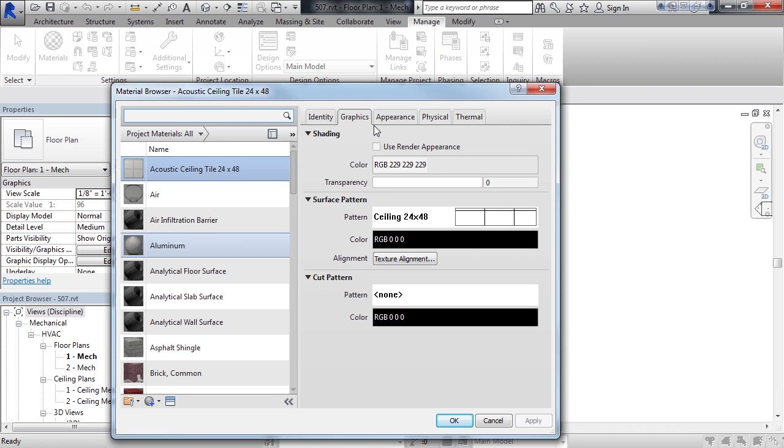The first icon in the settings panel is materials. Materials are loaded into Revit to be assigned to different elements like walls, doors, and windows, and they have a variety of settings: graphics, appearances, physical attributes, and thermal attributes. This information is used when we do analysis on our actual Revit models.

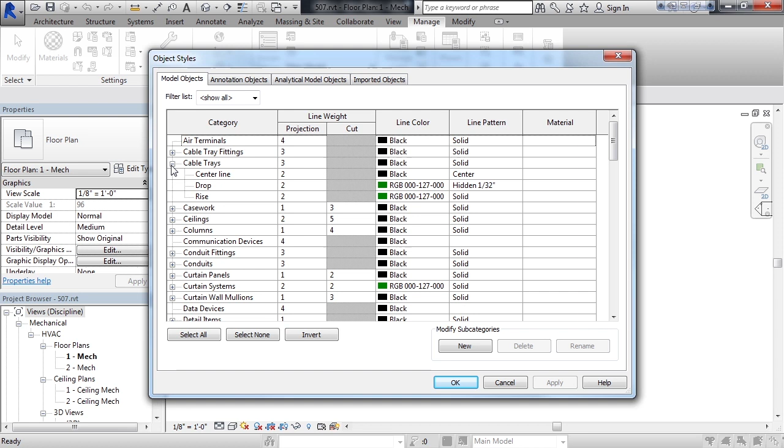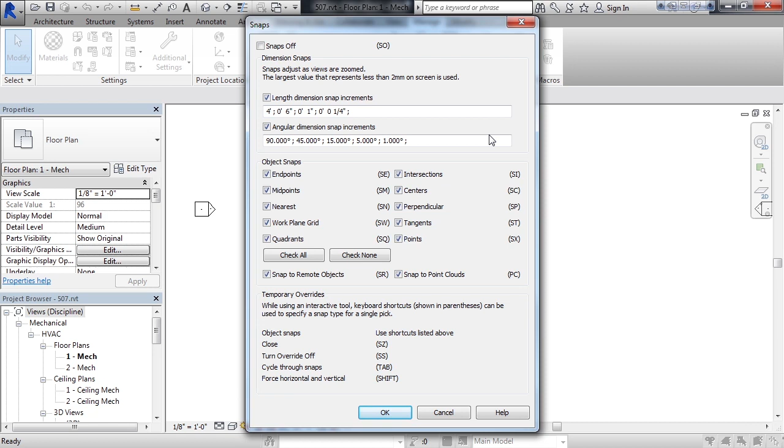The icon below that is Snaps, where we can set our snap interval, very similar to object snaps in AutoCAD. Here we set angular snaps, linear snaps, and how we want to treat snap conditions, meaning where we snap to. You'll also notice shortcut keys listed in parentheses. Go ahead and click OK.

Below snaps we have project information, which covers a variety of things relating to different parts of Revit. Click project information. Here we see organization name, description, building author, and at the bottom, project status, client name, address, name, and number.

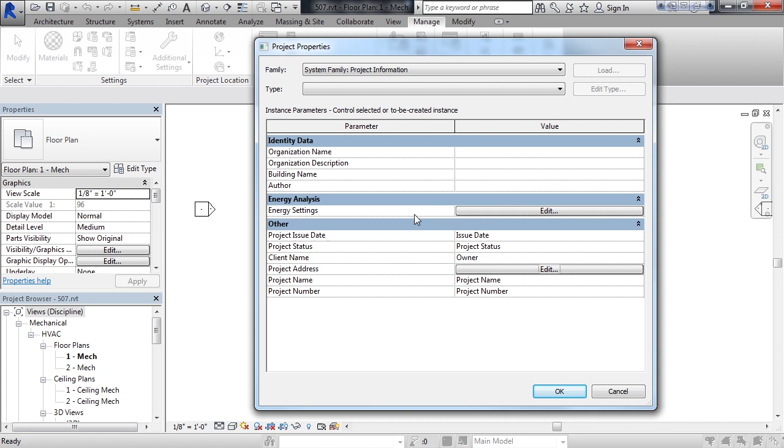To the right of project address, if you click edit, you can enter the address. If you go to energy settings and click edit, this is where you set the variety of settings used in an energy analysis. One thing to note would be settings we may want derived from the Revit Architect's model or project, relating to wall types, door types, floor types, and other building elements.

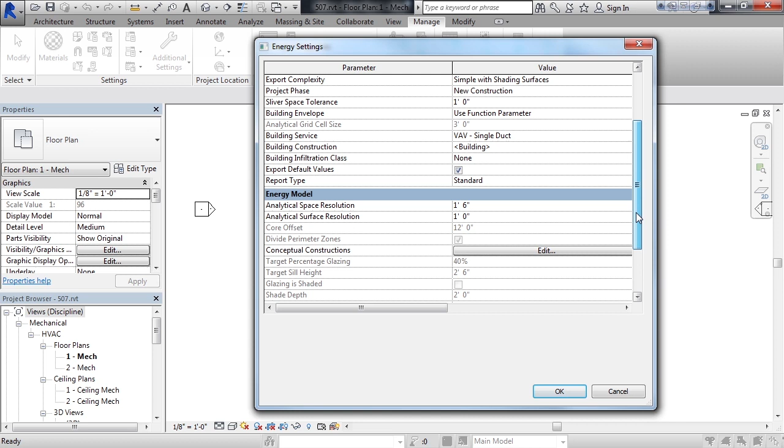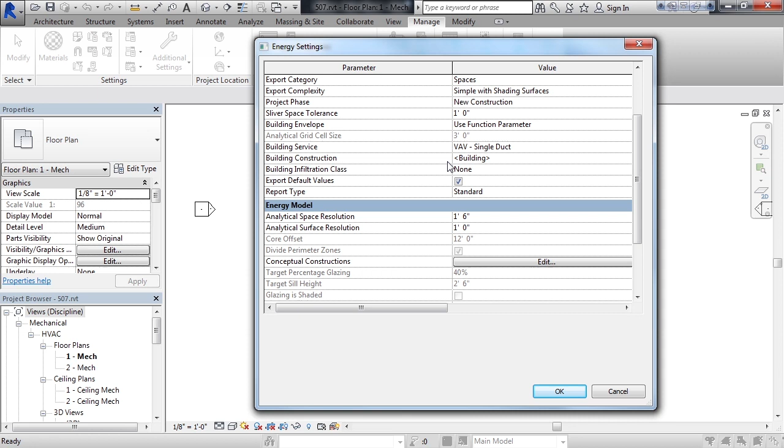As you scroll through the list you see a variety of things you can set, regarding the construction of the building and elements coming from the architect, and whether they're set or linked. We can verify this in the option for building construction. To the right of building construction, where it says building, click on it, and a button with 3 dots will appear—that's called the ellipsis button. Go ahead and click that.

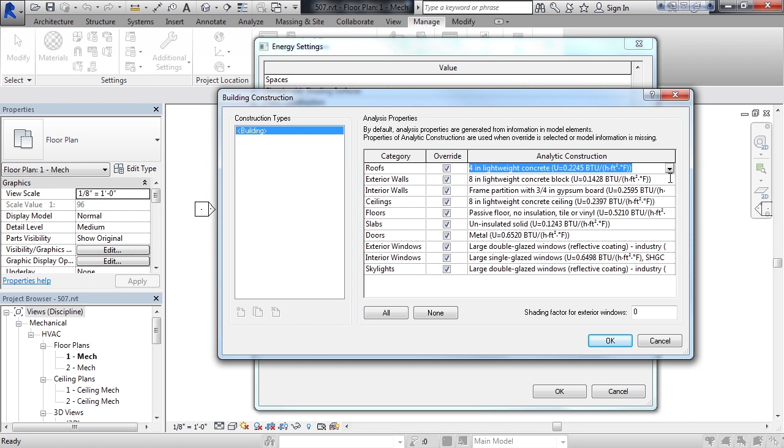This opens default construction types for each category. I can see there's an override because I'm overriding what's linked from the Revit Architect's project. Each of these, if you click the drop-down, has a variety of standard materials that could be used for each element. We'll speak more on this in another lesson, but this is where it's configured specifically for the energy analysis. Go ahead and click OK, OK again, and OK one more time.

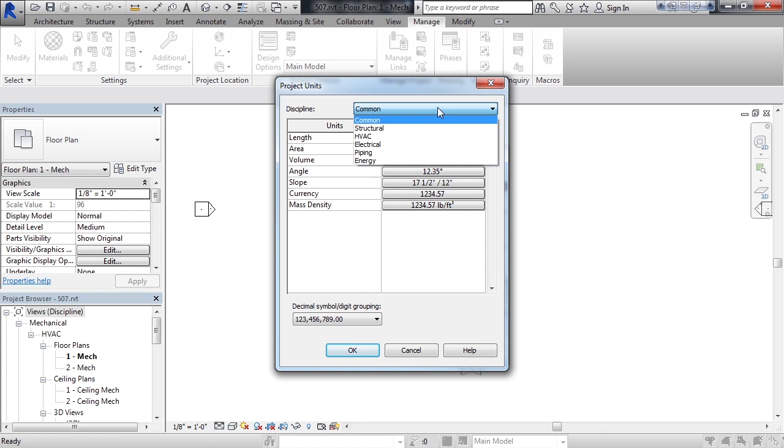Other icons cover various settings: project parameters, if you're keeping track of those, and project units—units for what we're measuring in, dimensioning in, looking at volumes, slopes, currency, density—plus a drop-down to look at specific settings by trade. Go ahead and click OK.

Other settings are shared parameters, specific parameters that can be shared back and forth between linked files. You have a Transfer Project Standards button, meaning all of these standards and settings could be transferred in from another Revit project.

You have Purge Unused. This is a very powerful command you may want to use after you're done with your Revit project or at various intervals. Basically it removes elements or components you're not using, making the Revit project file smaller. To the right we have a variety of settings for our different disciplines.

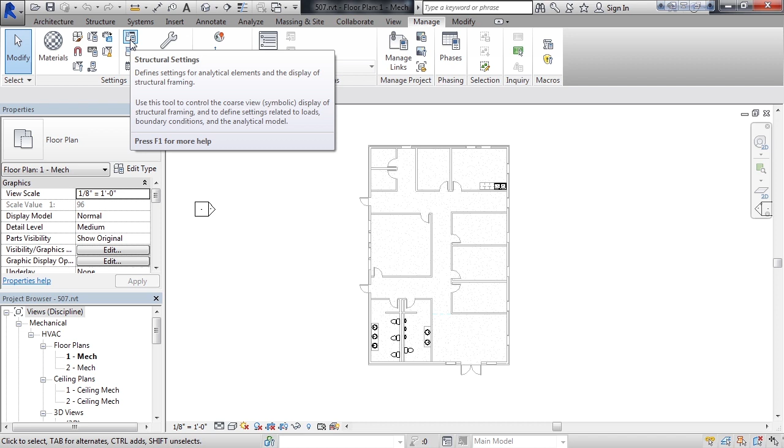Structural settings, and below that in the drop-down, settings for mechanical, electrical, and various other settings for load classifications, demand factors, and building and space type settings. Below that we have schedule settings and the ability to manage our schedule templates.

To the right of that are our standards for our Revit project—everything from fill patterns, hatch patterns, to line types, line weights, to callout symbols, arrowheads, and dimension types.

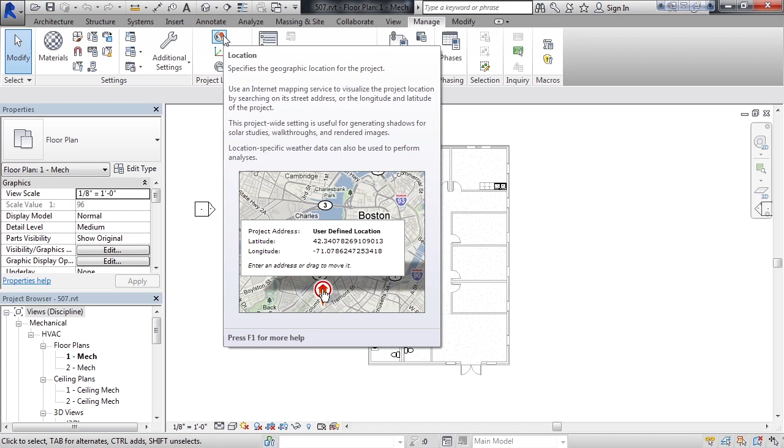To the right of that are our project information settings, such as project location. This is where we can set the actual location by city and state or longitude and latitude, and we can even set the weather conditions, coordinates of how the coordinate systems will be managed, and the position of where we're actually placing this on a site.

To the right of that are our design options—different options of our layout, layout A or layout B within the space. Manage links is what we looked at in another lesson, about how we can manage a linked Revit project, such as an architect's Revit project.

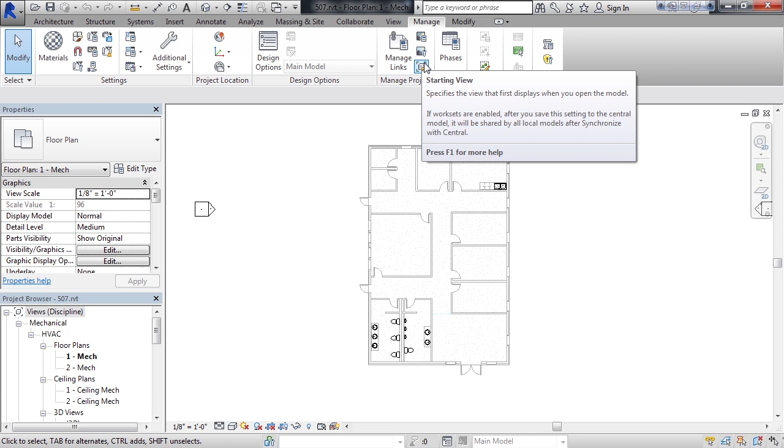The icons to the right of that are for managing images, managing decals, and which view you'd like to start with when anyone opens this Revit project. By default it says the last view looked at, or you could specifically say you want it to open a particular view upon opening this Revit project. I'm going to cancel that.

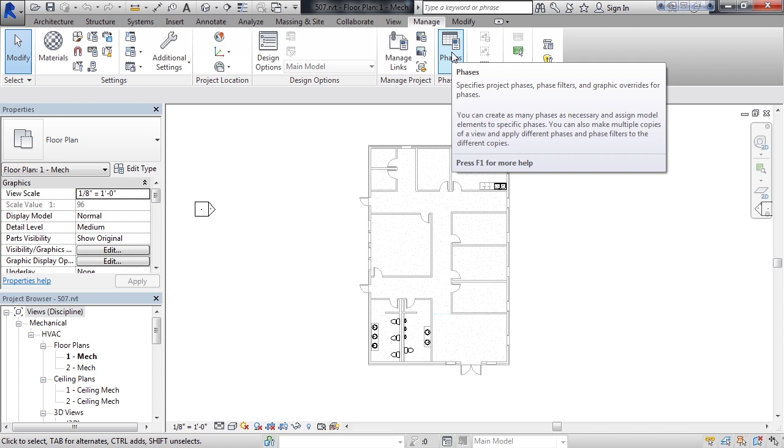Lastly, you have project phases. Phases being, from a timeline perspective, looking at what's existing, new construction, or demolition. Then you have phase filters based on these different phases and what to display or not display regarding graphic overrides for each of these elements. Go ahead and click OK.

So in this lesson we looked at various project settings and project information, ranging from materials to project location to energy settings, and settings carried down from our linked project, meaning the architect's project, plus our CAD standard settings—line types, line weights, dimension styles, arrowheads—and other elements as far as what's being managed, like the architect's file and its linking, decals, other images, and finally project phases.